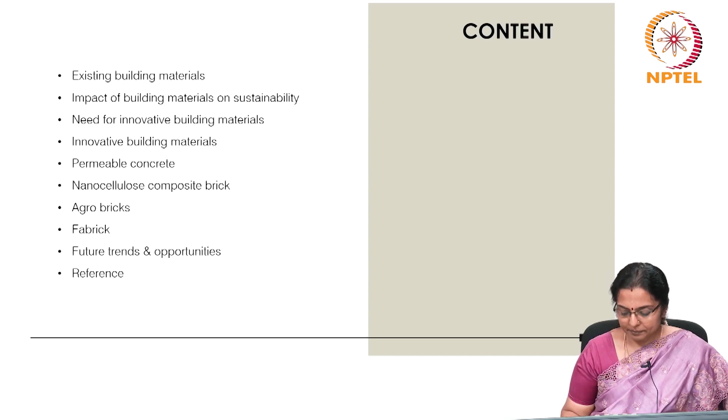Now, what are innovative sustainable materials? The rise of eco-friendly materials to meet growing environmental concerns has given rise to the need for innovative building materials, which must be sustainable materials too. There must be technological integration, which means it must be incorporating smart technologies for enhanced building performance. Customization and design flexibility is very important to meet the varying aesthetic and functional requirements of modern architecture.

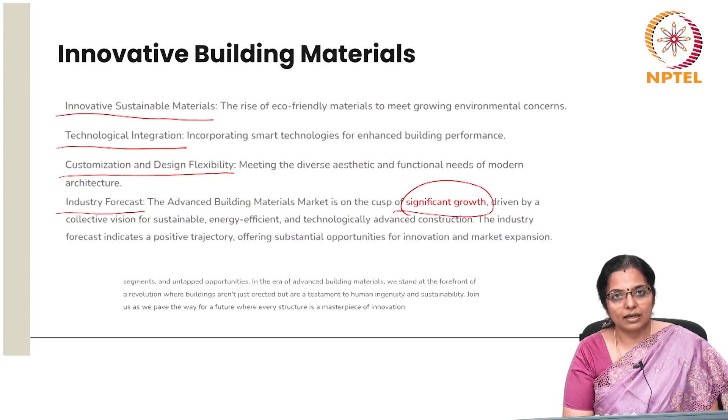Now, what is the need for innovating building materials? If you look at carbon dioxide emission by sector, you can see that the building sector, including the operation and embodied energy, comprises 35 to 39% of the total energy consumption. So, when the building sector consumes so much energy, decarbonizing the construction industry is an important step towards achieving the net zero goals for almost all countries. The production process of conventional building materials consumes a high amount of energy, which has a negative impact on the environment. The use of locally available materials and upgradation of traditional techniques can be a good option for sustainable development.

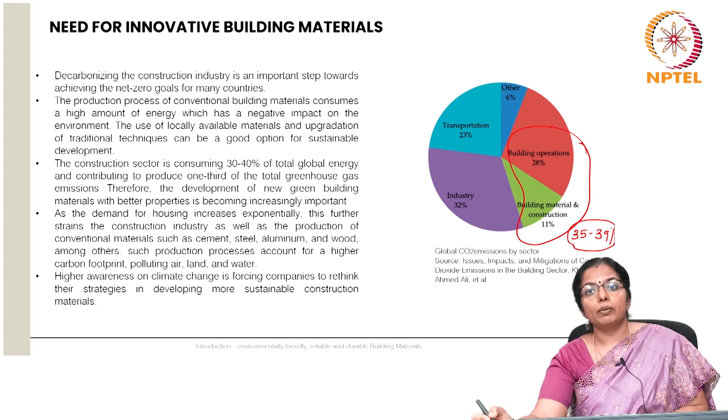The construction sector is consuming 30 to 40% of total global energy and contributing to produce 1/3 of the total greenhouse gas emissions. Therefore, the development of new green building materials with better properties is becoming increasingly important. As the demand for housing increases exponentially, this further strains the construction industry as well as the production of conventional materials such as cement, steel, aluminum, and wood, among others. Such production processes account for a high carbon footprint, polluting air, land, and water. Higher awareness on climate change is forcing companies to rethink their strategies in developing more sustainable construction materials.

Now, let us look at what are innovative building materials and what are their characteristics. The use of sustainable building materials, which is a way for the innovative materials, taking into account all aspects of sustainability such as environmental, economic and social sustainability, has many advantages. They have a low environmental impact with low energetic production processes. Using agro waste in developing construction materials, either wholly or partly, helps tackle the sustainability challenge while reducing pollution and adverse environmental effects. So, what must be the characteristics of innovative materials?

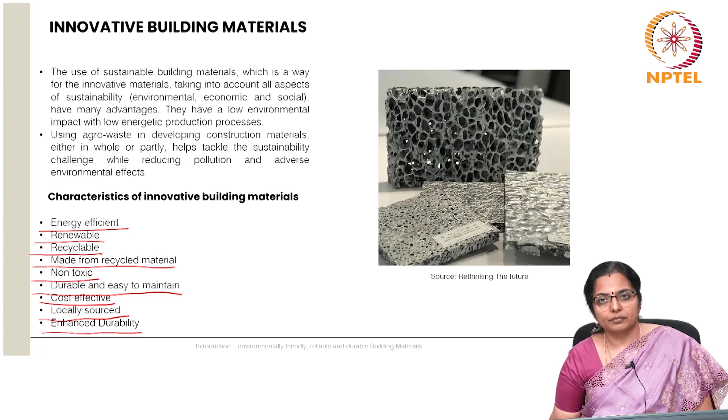The material must be energy efficient. The production of the material, as well as what it does to the operational energy when we use it, both put together must be energy efficient. It should be a renewable building material, that is, it must not be a material which will perish. It must be recyclable, made into another form, and it should be made from recycled material. It should be non-toxic, should not cause poor IAQ, should be durable and easy to maintain, should be cost effective, and as far as possible locally sourced, because that will reduce the transportation cost of the embodied energy, and must have enhanced durability. It should last long. These must be the characteristics of innovative building materials.

What is the necessity to finding the innovative building materials we have seen? We will focus on concrete for now, because concrete is supposed to be a material which is most consumed in the construction industry. So, concrete is highly used in the construction industry. It comprises a mixture of cement, fine aggregate and coarse aggregate, all of which are derived from natural resources, and on top of that, cement is a highly energy consuming building material.

Subsequently, as the demand for housing and buildings increases, there is significant pressure on non-renewable natural resources, thereby sparking research on the alternatives for traditional concrete.

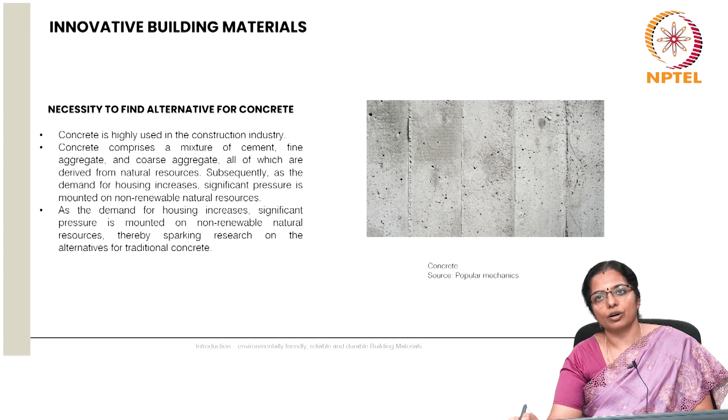Now, let us look at why there is necessity to find alternative for bricks. So, brick as a masonry component has been predominantly used in the construction industry since early centuries. Traditionally, the brick making process involved three fundamental steps: mixing the raw materials, which is earth-based materials such as clay and water, molding the brick and drying it, and finally firing them to obtain appropriate strength.

Now, a significant shortcoming of this brick production process results in the generation of substantial amount of greenhouse gases. The second disadvantage of the process stems from their excessive usage of non-renewable materials such as water and clay, thereby facilitating the depletion of natural resources. Because this clay is fired, unlike the mud that we saw in the first class, where the blocks are not fired. So, a more effective strategy regarding the transition to more sustainable brick making process is required.

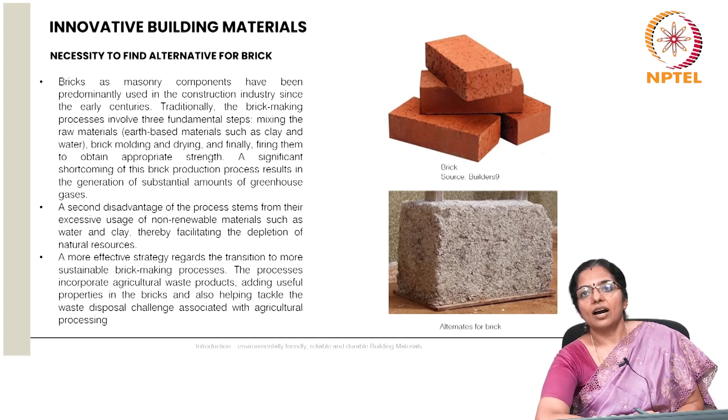So, let us now look at permeable concrete. Permeable concrete is the concrete containing interconnected voids inside to allow air or water moving through it. The fundamental material characteristic of permeable concrete is its open pore structure, primarily the connected porosity and the large pore sizes, which is caused by gap grading coarse aggregates and little to minimal amounts of fine aggregates. Water easily percolates through the paving matrix and the subsoil beneath when permeable concrete is utilized as paving material.

If we look at where this can be applied, permeable concrete is beneficial for conserving stormwater and recharging groundwater. This can be used to absorb the noise of vehicles and adjust the temperature and humidity of the earth's surface. It can provide protection from flood, drainage, can reduce noise, and maintain the balance of the urban soil ecological environment.

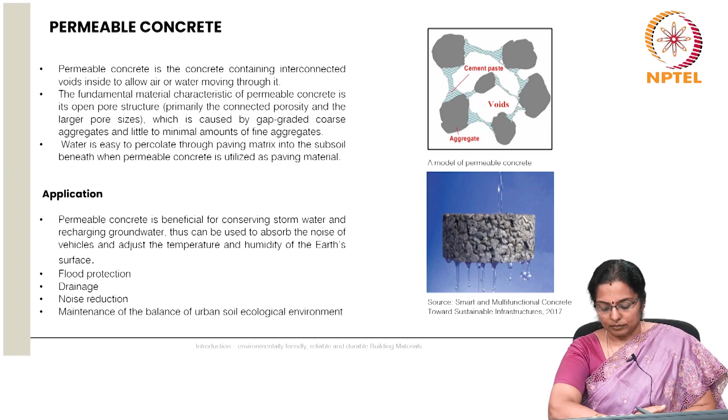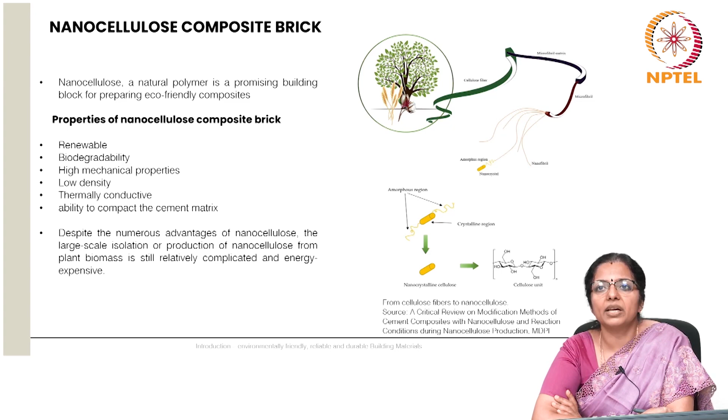Now let us look at a brief of another innovative building material, which is nanocellulose composite brick. Nanocellulose is a natural polymer and is a promising building block for preparing eco-friendly composites. Its properties include the fact that it is renewable, it is biodegradable, it has high mechanical properties, it is low in density, it is thermally conductive and has the ability to compact the cement matrix. Despite the numerous advantages of nanocellulose, the large-scale isolation or production of nanocellulose from plant biomass is still relatively complicated and energy expensive.

Now let us have a look at agro bricks. Agricultural wastes are the residues generated from the cultivation and processing of raw agricultural products such as crops, fruits, poultry, dairy products, etc. Incorporation of agricultural waste materials in brick production is an efficient method to diminish the environmental pollution, reduce the amount of generated waste and protect the raw materials from depletion.

The disposal of solid waste generated from agricultural industries is another serious problem that is faced by developing countries like India. The major quantities of waste generated from agricultural sources are sugarcane bagasse, rice husk, jute fiber, coconut husk, cotton stalk, etc. Reuse of these wastes as a sustainable construction material appears to be a viable solution not only to the pollution problem but also to the problem of landfilling and high cost of building materials.

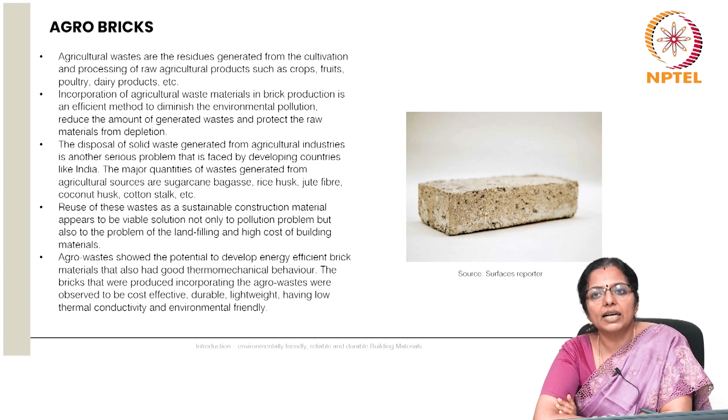Agro waste shows the potential to develop energy efficient brick materials that also had good thermomechanical behavior. The bricks that were produced incorporating the agro waste were observed to be cost effective, durable, lightweight, with low thermal conductivity, and environmentally friendly. Let us look at agro bricks from date palms.

Date palm is one of the high growing varieties. Its mesh fibers, also called trunk fibers or surface fibers, leaves, bunches, rachis and petioles are some attractive date palm fibers that have been investigated as construction and building materials.

Date palm fibers can be used in concrete and mortar to improve their properties and can be utilized to make bricks. An increase in fiber content beyond a certain limit results in a decrease in compressive strength and tensile strength. It has been proven that date palm fibers could be classified amongst the best construction materials in terms of their thermal insulation properties.

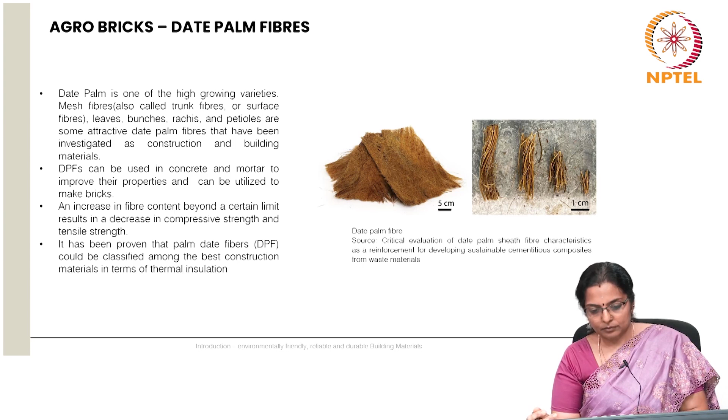Let us have a look at rice husk in agro bricks. Rice is the main staple food of Asia and part of the Pacific overseas. Over 90% of the world's rice is produced and consumed in the Asia Pacific region. Rice husk is an abundantly available waste material in all rice producing countries and it contains about 30 to 50% of organic carbon. Using rice husk to produce brick is an effective way of reducing agricultural waste and reducing the embodied energy of the material.

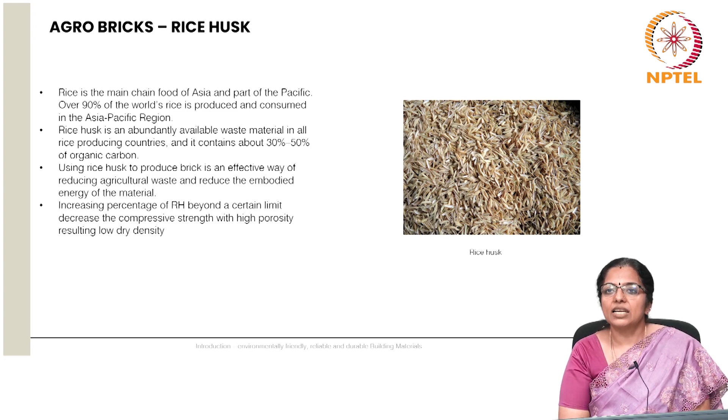Increasing the percentage of rice husk beyond a certain limit decreases the compressive strength, with high porosity resulting in low dry density. What if we use rice husk ash? Rice husk ash is one of the ingredients that is often used as an environmentally friendly material. Rice husk ash is the product of the incineration of rice husk.

The characteristics of the ash are dependent on, number 1, composition of the rice husk, number 2, burning temperature and number 3, burning time. The results of the study indicate that the higher the percentage of rice husk ash, the higher the water absorption capacity. The increase in the percentage of rice husk ash causes a decrease in the compressive strength of the bricks.

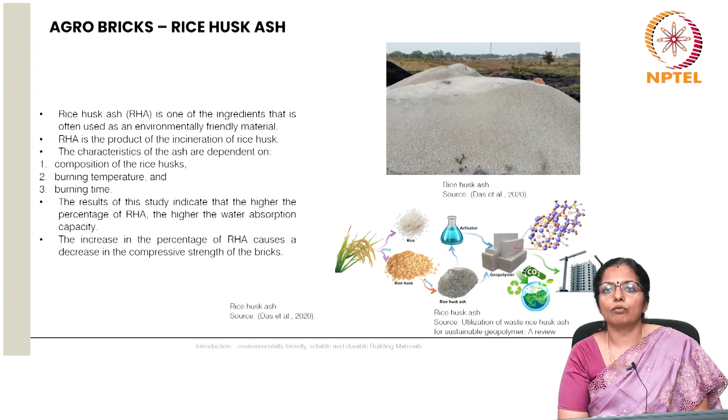And we will see Fabrick. This has something to do with fabrics and textiles. Huge amounts of cotton and textile waste are disposed of by countries all over the world. The majority of cotton waste and textile waste is expelled in such a way as to cause serious environmental problems. Cotton and textile waste can be used to produce a composite building material.

Cotton and textile waste bricks are lightweight. The cotton and textile waste bricks fulfill compressive and flexural strength requirements. They are superior to concrete bricks for insulation, and using cotton and textile waste bricks with lower thermal conductivity coefficients will prevent energy loss from buildings.

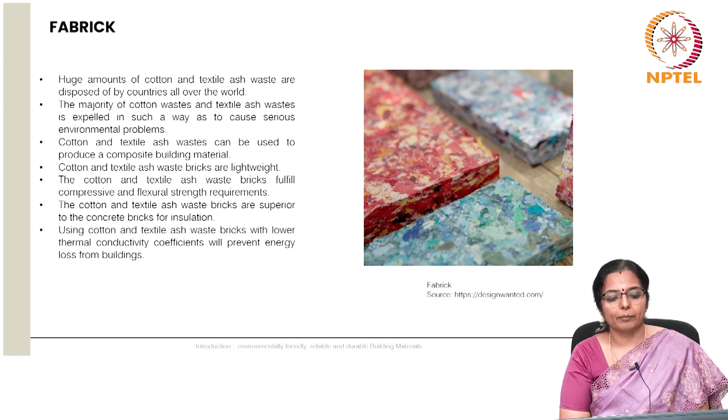So, conceptually, what do innovative building materials offer by integration in design? We can have high performance facades, that is, efficient building envelopes can enhance energy performance and indoor comfort. We can look at innovative building materials not only in isolation, but as part of design components. Hence, we can have high performance facades, green roofs and living walls, nature integrated designs for biodiversity, insulation and reduction of urban heat island (UHI).

Instead of doing all of these with conventional building materials, we can use innovative building materials and create innovative design components. Smart insulation solutions: innovative thermal materials for improved energy efficiency in various climates, depending on the climate zone. So, there is a need for innovative building materials in order to go sustainable, to be energy efficient, and to ensure that we do not deplete the natural resources.